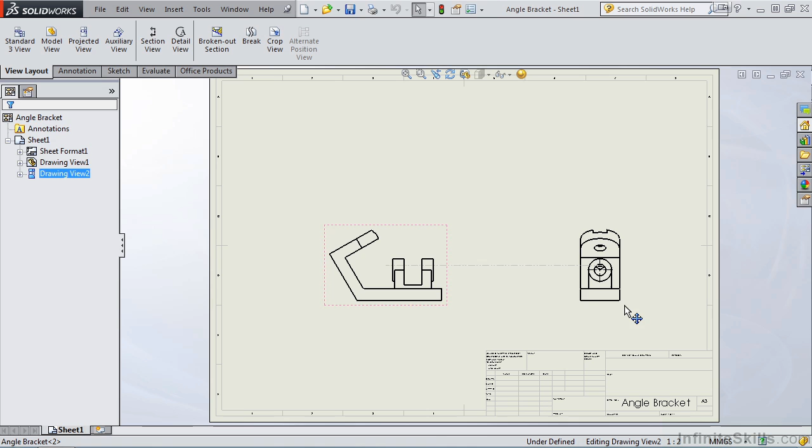Now, before we start the broken out section command, I am going to move these two views over to the right. I'm going to select the front view, scroll down, and change my display style. Currently, my display style is not displaying the hidden line type. I want to change that. So I'm going to select the hidden lines visible, and notice hidden lines are visible in both views.

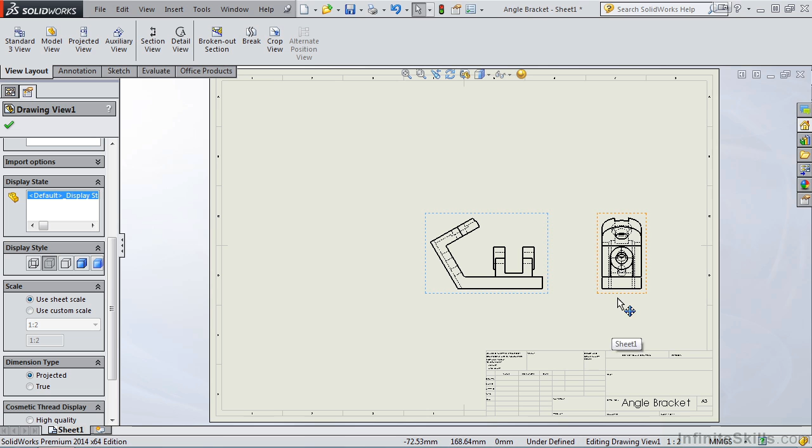Now, why did it update in this view? It's because this is the parent view, and I made the change to the parent view. So that change is reflected in the child. Now, before we get into the broken out section, let's create an auxiliary view from this edge here. And the reason I created this auxiliary view, I wanted to show you that these hidden lines that you see here are these two holes here.

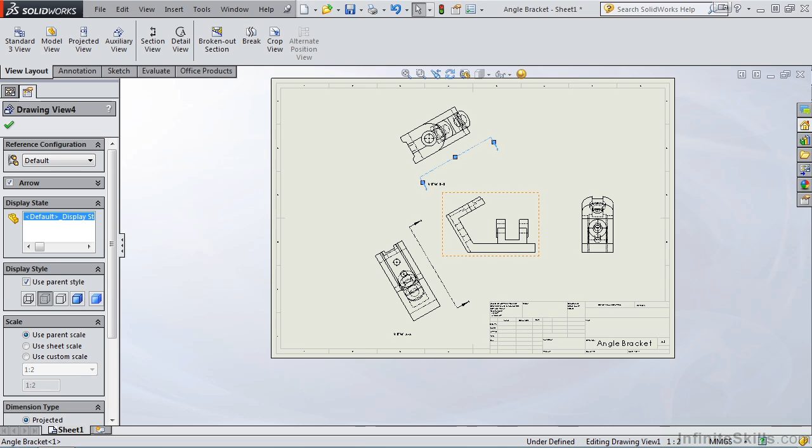Let's go ahead and create another auxiliary view and move the viewing line, size it down a bit, seems a bit large, and reposition the label. Now we're ready to start our broken out section. What I want to do is break out this corner of the part and look inside of the part. So I'm going to zoom up on that area. And before I do that, I want to see how deep the part is. I'm going to put a smart dimension on this auxiliary view, and we see it's 64 millimeters deep.

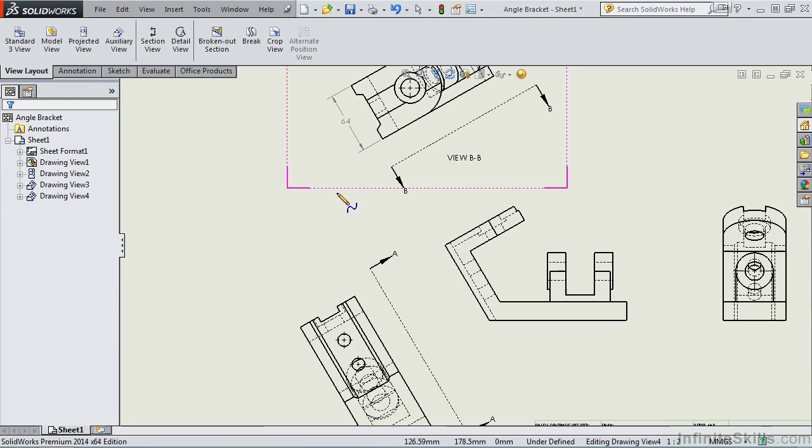I'm going to go back to my view layout ribbon, select the broken out section icon, and my cursor has changed to a pencil with a spline. Now what I need to do here is create a spline for the area I want to create the broken out section for. And this spline needs to be a closed spline, so as soon as I close it, you'll see my property manager reappear.

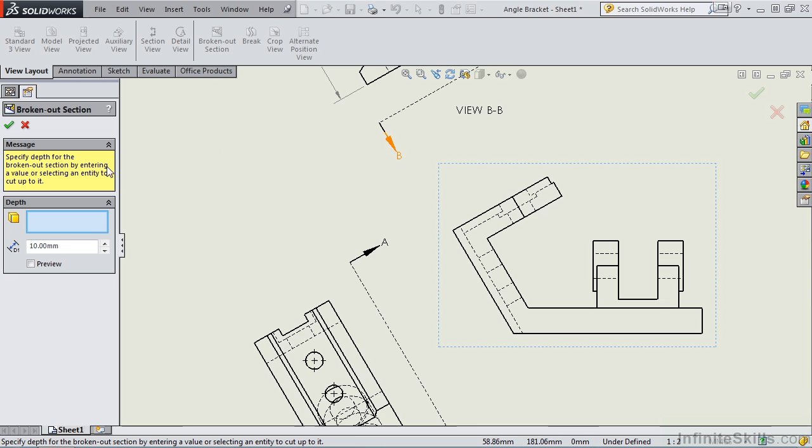Now, how deep do we want to create that broken out section into this part? There's a couple ways you can specify that. If you select inside of this window here, and then go up to the top view, for example, you can select an entity, and that would specify the depth. Or you can key in a value. Let's go ahead and try to key in a value. I am going to key in 20.

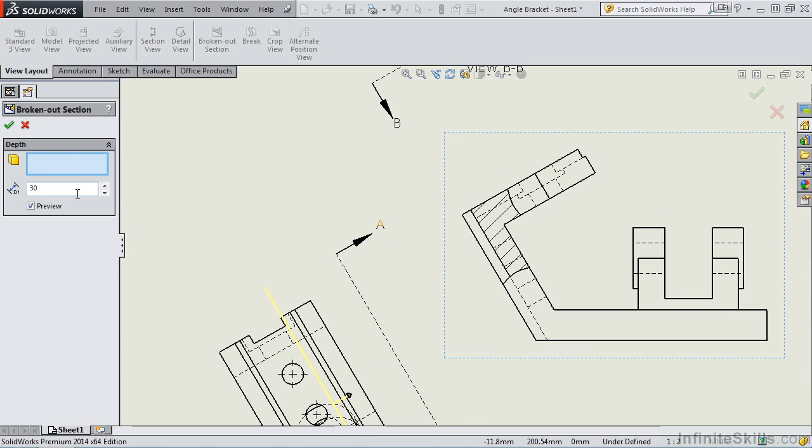Let's go ahead and select preview, and notice the preview for the broken out section. Let's go ahead and change that to 30. And notice the preview again. And if we zoom up, you see a couple lines here. These two lines are required when you do a broken out section, and that's part of that spline that I created at the early stages of this command. So this is how we create broken out sections with the SolidWorks software. It's very intuitive and very user-friendly.